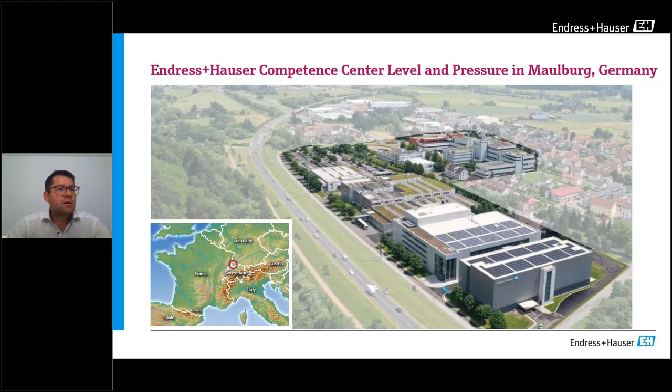And we are not producing only in Germany. We also have associated production sites all over the globe, starting from Japan, over China, India, USA, and also in Brazil. We have entities which produce devices to serve local markets. Today, we want to focus on the food and beverage industry.

For these products, simplicity and ease of use is most important. We also offer IO-Link connectivity for these transmitters, to integrate them into new digital controls. Then we have the lean segment, where we offer a modular design with various sensor technologies, different electronics and housing concepts, which enable the perfect fit in most applications in the food and beverage industry. Also for this product segment, we will offer IO-Link connectivity in a few weeks from now.

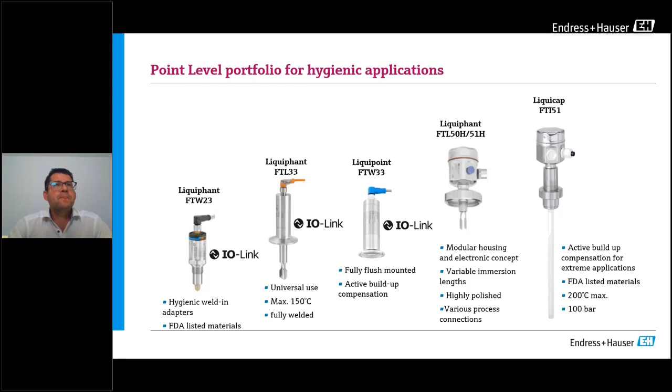But let's start with the continuous measurement. The most common technology in food and beverage for level measurement is currently the hydrostatic level measurement. By using a pressure sensor at the bottom of the tank, we can measure the weight of the hydrostatic water column and refer this to the liquid level inside the tank. This technology is very easy to understand, easy to install, and proven in use for several decades already. It's still state of the art in the food and beverage industry, and the measurement can be realized at a reasonable price.

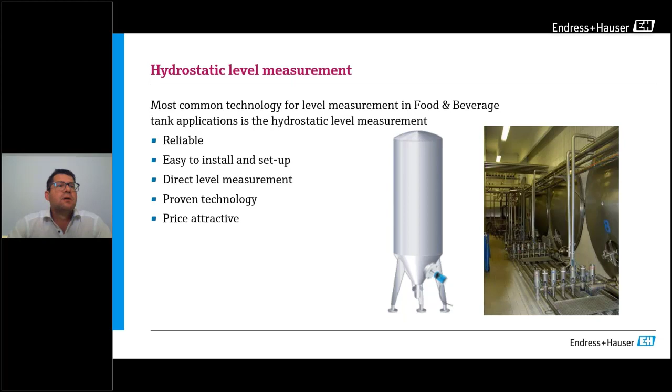But besides hydrostatic level measurement, we also offer a comprehensive portfolio of other technologies, like the capacitive technology, the guided wave radar technology, and also the free space radar. All of these technologies have their pros and cons.

Capacitance probes, for example, are often used in applications where reliable measurement in fast filling and draining applications is required, so typically narrow tanks, small tanks, filling processes. Here the Liquicap sensor has its advantages because it's a really fast measurement technology. Also, if foam is present in the application, it does not affect the measurement, so it still gives you a reliable reading of the real level in the process.

Another advantage of the Endress+Hauser solution for the capacitance probe is that it comes pre-calibrated from the factory, so you can install it and commission it without any further adjustment. So it's a real plug-and-play solution.

However, capacitance measurement cannot be used anymore if the dielectric constant of the measured media is changing. So if you have different types of media inside the process which have different dielectric constants, this has an effect on the measurement of the capacitive device, and therefore you would have to readjust the instrument, which is of course not always possible.

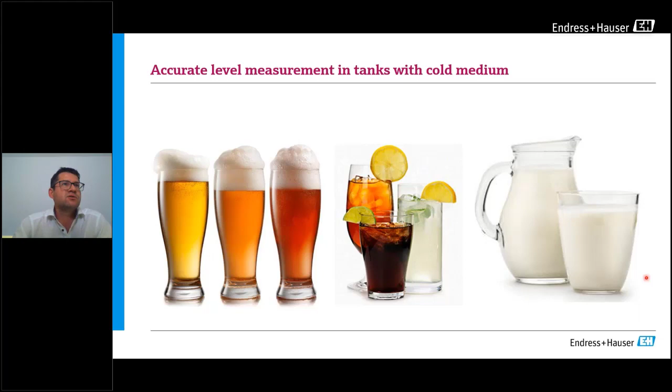This can happen if lids are not tightened properly or cable glands are loose. The so-called pumping effect is also quite a critical obstacle in the process.

This typically occurs when you have changing process temperatures, like during the processing sequence, and after that you start the cleaning cycle, and temperatures rise from close to 0 up to maybe 80 or 90 degrees. These temperature changes cause contraction and expansion of the air inside the instrument, and this pumping effect leads to the replacement of air. If the air is saturated with water or dust, it may settle inside the device.

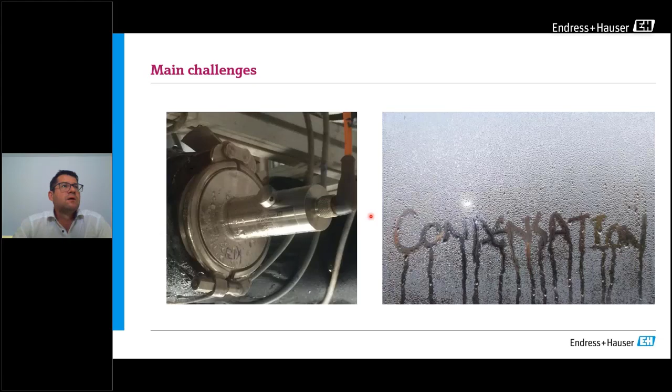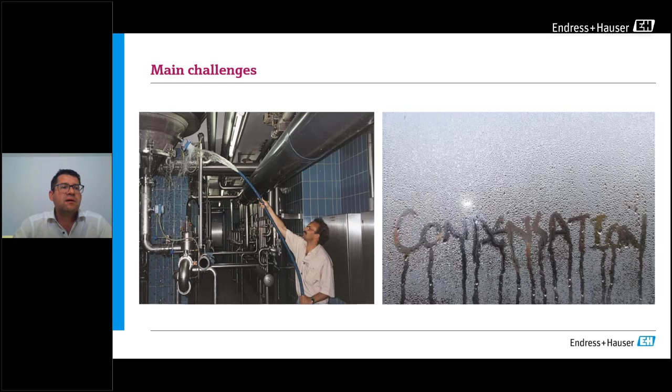You probably also know this picture. Heavy washdown also occurs in many applications, in many plants where devices are cleaned together with the whole equipment, and here too we have to make sure that everything is tight. Typically our instruments are IP68 or IP69 certified and designed.

In the industry, Gore-Tex filters are used to prevent most of the moisture and water. But as you also know from Gore-Tex clothes, it prevents water from entering through the cloth, but if you have vapour, it's still able to penetrate through Gore-Tex. So water vapour or moisture in molecular form will be able to penetrate inside. An ordinary pressure transmitter of this kind of construction will not survive very long in an application, especially a storage application for milk or beer.

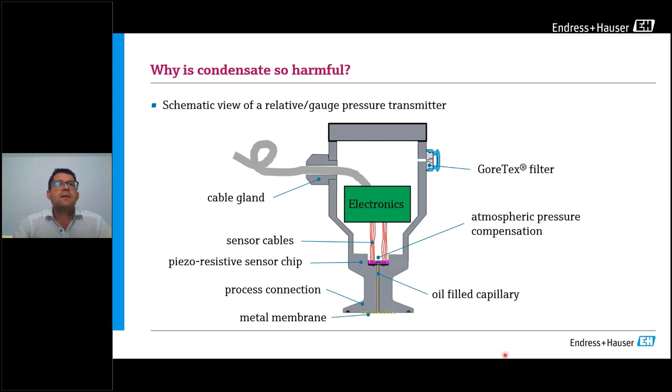Therefore, Endress+Hauser has developed two different types of technologies to prevent water from entering, especially into the sensor module. A very common and well-known technology is the so-called Contite technology with our metal membrane of the Deltapilot FMB50 and FMB70. As the name indicates, it's spelled wrongly, because when this product was designed about 30 years ago, we didn't have so many native English speakers in the company, but the name survived for 30 years. This is a technology which is really reliable, especially for hydrostatic level applications.

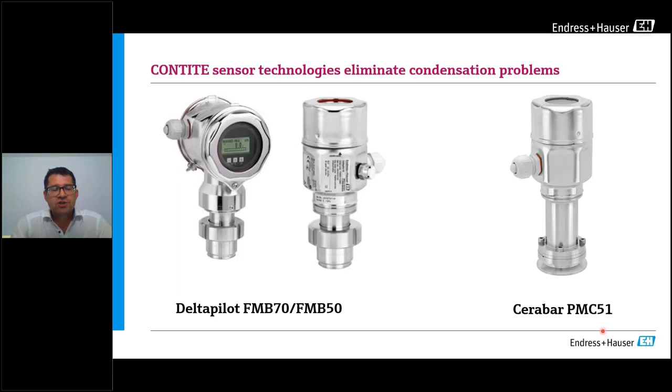Recently, meanwhile also 5 years ago, we have extended the Cerabar PMC51, the ceramic sensor module, with an additional Contite technology to make sure that the ceramic also resists in such critical applications.

What you can see here is the setup of the Contite sensor with the metal membrane. You see the metal membrane here, which is in the process, then we have the piezo-resistive sensor chip, the sensor element, and at the back side of the sensor an additional membrane, so it's a kind of two-membrane transmitter. This additional membrane is only used to prevent water from going into this little hole and flooding the sensor. On the right side you see the schematic view: the two membranes, the pressure from the process, the atmospheric pressure coming from the backside, and in between there is our pressure sensor.

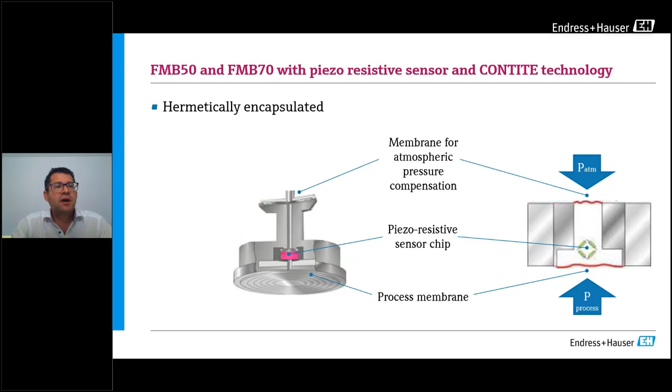Very reliable. We have a lot of devices in the market, several million installed, and there are devices coming back after 30 years of operation still in good condition. So a really reliable technology for applications when it is cold.

As I mentioned, the main benefit of the Contite technology of the Deltapilot FMB50 and 70 is its complete water resistance or condensation tightness. But we can also reduce downtime, for example during process changes, because the recovery time after temperature shocks is extremely good. We have the sensor very close to the process, and there is always a temperature sensor built onto it, which allows us to detect temperature changes from the process very rapidly so they can be immediately compensated.

That's an additional function of the Contite technology. We use a Hastelloy membrane, which has better corrosion resistance, especially against cleaning media. And also, like all our products used in hygienic applications, we have full hygienic compliance: the hygienic design criteria of 3A and EHEDG are fulfilled, and the materials used comply with FDA standards and the European Food Regulation 1935/2004.

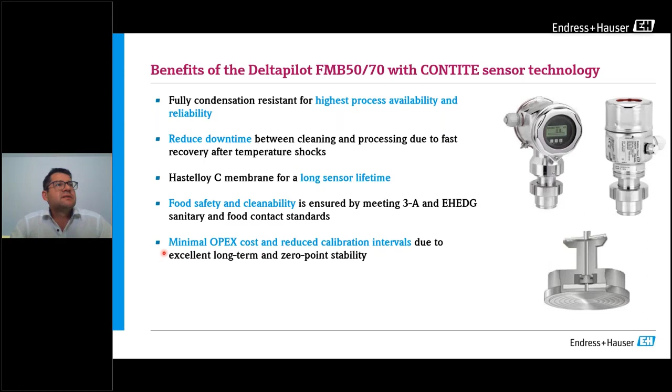The zero-point stability and the long-term stability are also very good, because we're talking about hydrostatic level measurement, which means a small change in long-term or zero-point stability will have an effect on the level reading. Especially in small tanks, this can have quite a few percentage of impact. That's why the devices are tuned especially for level applications. You can, of course, use them also in pipe pressure applications, but typically we go into hydrostatic level applications with these devices.

Accuracy, of course, especially with the premium device, we have high accuracy of the sensor, and in addition, the electronics has internal temperature compensation, which brings us a few percent of additional accuracy over the whole range.

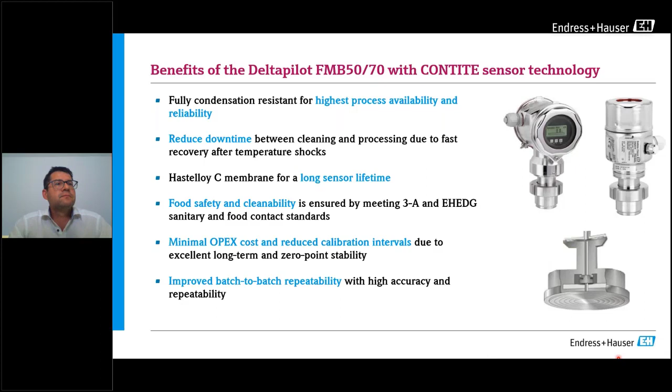The ceramic, on the other hand, uses a different technology. Here on the left side, you can see how the ceramic basic module works. We have a thin ceramic membrane and the sensor body. These two components form a capacitance. This is an oil-free sensor, so we don't use any filling oils. And you can imagine, for the atmospheric pressure compensation, if moisture were to enter into this little gap between the electrodes, it generates immediately a shortcut.

To prevent this, we have developed a very extensive installation to absorb all the moisture which might penetrate into the sensor. A so-called dehydration module is used, which has different functions, but the main function is to absorb moisture, whatever goes into the sensor.

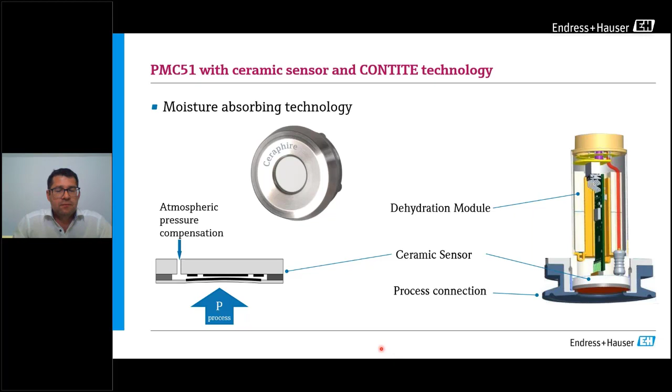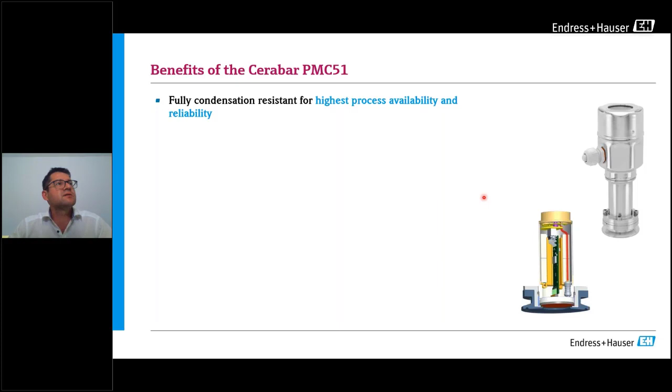And this is the PMC51. The benefits of this device are, of course, also very good corrosion resistance. We have a self-monitoring function, which is unique for the ceramic sensor. As soon as a ceramic sensor is flooded, for example from the backside with water, or is damaged mechanically, the device will immediately recognize this and send out an alarm. Ordinary pressure transmitters with metal membranes have an oil filling, and it takes some time until this oil leaks into the process—sometimes several days or even weeks until a broken sensor is identified. So the advantage of the ceramic is that it reacts immediately to any mechanical or electrical damage.

Also, a big advantage of the ceramic is full vacuum resistance, due to the fact that we don't have an oil filling, and oil typically tends to boil under certain vacuum conditions. We can go with the ceramic down to absolute vacuum, meaning 0 bar or 0 millibar absolute. And of course, ceramic is much more robust than metal membranes. So with the ceramic, we go also into applications where we have fruit pieces, for example, or frozen ice applications. All this is not a problem with the ceramic because it's very corrosion and abrasion resistant.

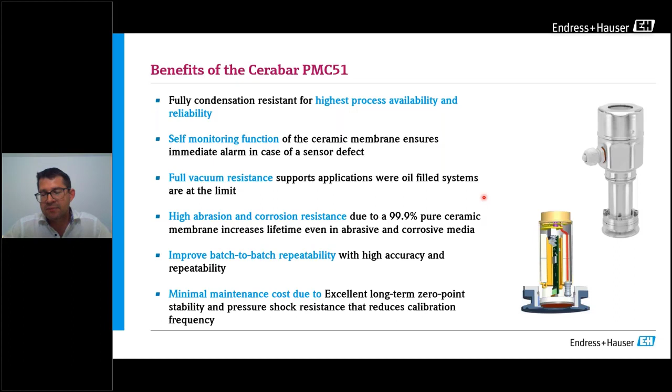Also here, high accuracy and repeatability are important—first, to come back to the production process after the cleaning cycle, but also to make sure that for hydrostatic level applications you have the needed performance. The zero-point stability and the pressure shock resistance of the ceramics is unbeaten in the industry. This technology is very reliable. Pressure shocks up to 40 times the nominal pressure range can easily be survived.

As mentioned, for these CONTITE technologies, either the ceramic or the metal membranes, you can use them mainly in applications in the milk and beer industry—fermentation or maturation tanks, soft drink applications, storage tanks where permanent low temperatures are present, but also sometimes in potable water applications, especially in areas around the equator—areas where you have typically high humidity in the air, which generates condensate quickly. So these are the applications to use a CONTITE technology.

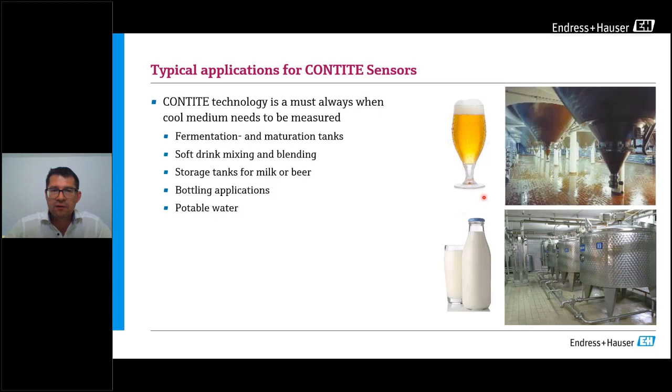Besides these already presented CONTITE sensors, we also have further types of pressure sensors in the portfolio. The classical and most economic technology is the piezo-resistive sensor, shown here on the left side. It's a relatively small sensor design with a metal diaphragm and an oil-filled capillary. Here on the schematic view, this is the membrane, here we have the oil-filled capillary, and at the back there is the piezo-resistive element. However, having the piezo-resistive element relatively close to the process means we are also restricted in the temperature range. These devices typically go up to 130 degrees; long-term, more than that would kill the electronics or the sensor module.

Then you have to go for another technology, the diaphragm seal technology. We use a similar basic sensor construction as on the left side, but with much longer capillaries, and we use a kind of adapter concept to adapt to different process connections. So this is the diaphragm seal device.

These devices are very common in the food and beverage industry. However, normally the temperatures in the process don't exceed 100 degrees because most of the media processed in food and beverage are boiling at 100 degrees, and this is typically not wanted. So the PMP51 is the first choice.

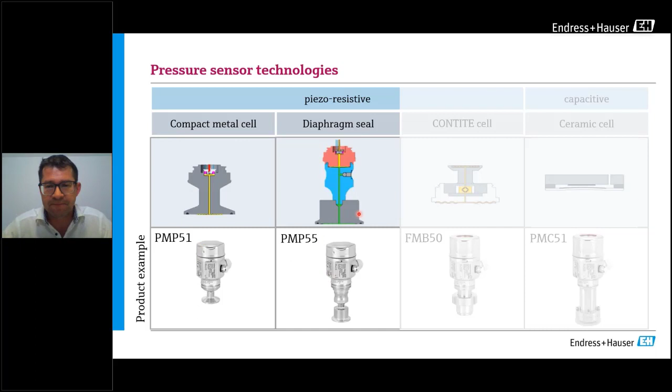Just to summarize, the four different technologies. This is the basic model, which suits most of the applications, pipe pressure applications. You can use it for steam, for water, for air, all the utility applications. We offer also threaded connections here.

So very universal device. The diaphragm seal you use when you have high temperatures, above 130 degrees - you can go up to 400 degrees centigrade by the use, for example, of capillaries. And we have an extremely high variety of process connections. Also different membrane materials like tantalum or hastelloy or monel, etc. are available.

And the two CONTITE devices, the metal device with CONTITE cell and the ceramic device with CONTITE cell, they offer, of course, especially advantages when it comes to hydrostatic level measurement. Or when you use the ceramic, you can use it also in vacuum applications, or you utilize the self-monitoring function.

Now I'm coming to the point level applications. There are various products available on the market based on different measuring principles for point level detection in food and beverage applications. Basically, three technologies have proven to be most reliable.

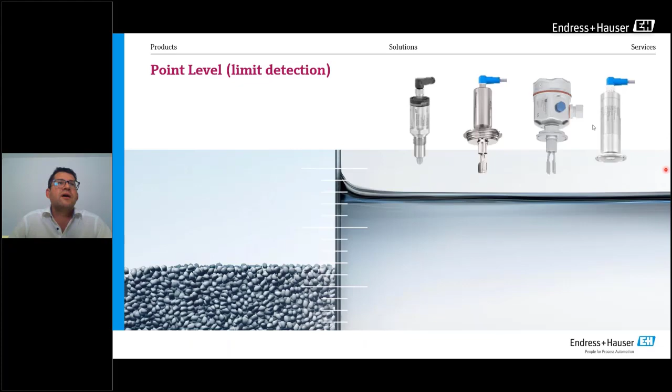So the tuning fork is an invention of Endress+Hauser. This technology was developed in the 1970s already and made its way through the decades. Today we have an installed base of more than 10 million devices out in the market in all different types of industries, not just in food and beverage, but also in chemical, oil and gas, and mining industries. This type of sensor is used to a high extent because they have proven to be really reliable and safe.

So, and why is that so? First of all, it's a plug and play device, so there's no calibration needed. You put it into whatever kind of media and it will work.

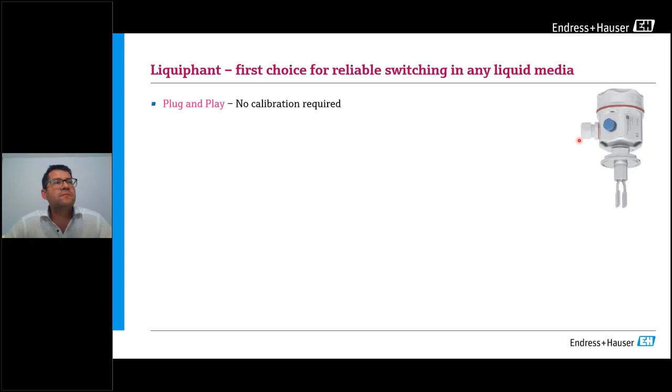Also, the mounting position is not important, so installation from the bottom is possible as well as from the side or from the top. We have an active measuring system, so it's not like a float switch, for example, which is a passive device. Here, the sensor function is permanently monitored, and by the use of our new heartbeat technology function, you are also able to monitor if the device is getting corroded.

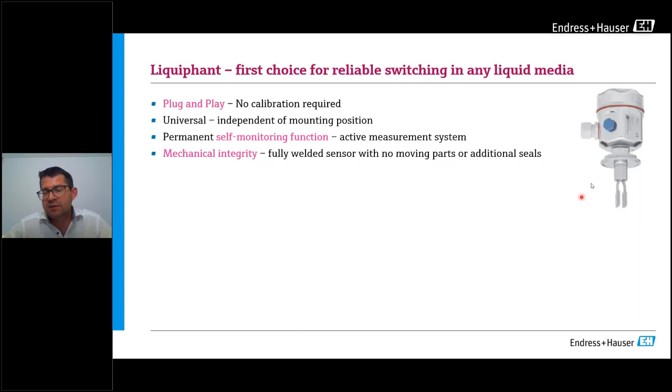Mechanical integrity is also of big importance. It's a fully welded stainless steel device, so the sensor, the process connection, and also the extension tube are completely made of one piece of metal or welded to each other. So there are no additional seals, no moving parts, and that makes it also very robust in the industry.

Also, no plastic parts which may fall into the process are used. So if you have a broken membrane or a broken sensor, for example, one of the forks is broken down, it can be easily detected in the process by the use of a metal detector.

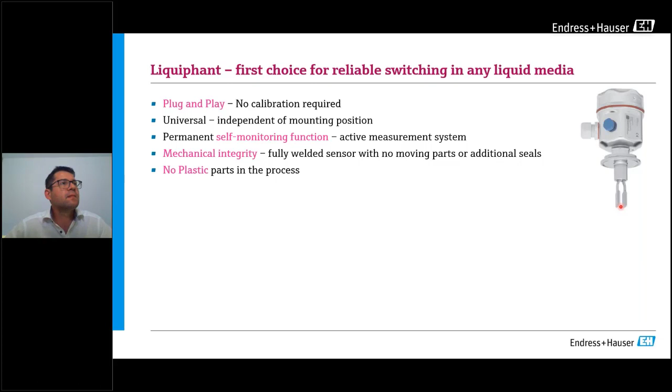But most important is that it's a completely independent system. So build-up doesn't play a big role here as long as both parts of the fork, so both tines, are free and not covered by the medium or by the build-up. It will still measure very reliably.

Also, the media properties, may it be different conductivities, oil or water-based media, or different viscosities, don't play a role. Air bubbles and foam are not measured or detected by the system, so we detect the pure liquid level. And also external vibrations don't affect the measurements, like turbulences or extreme pressure or temperatures in the process.

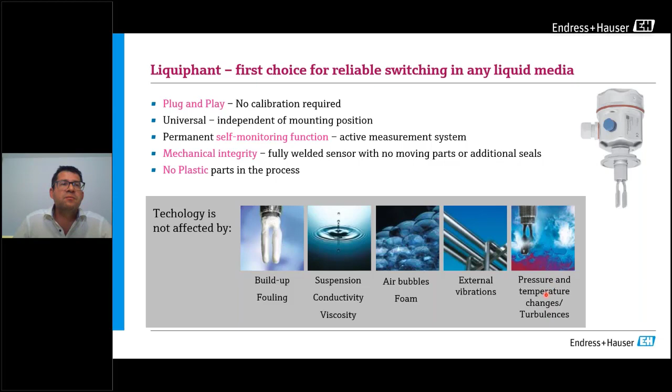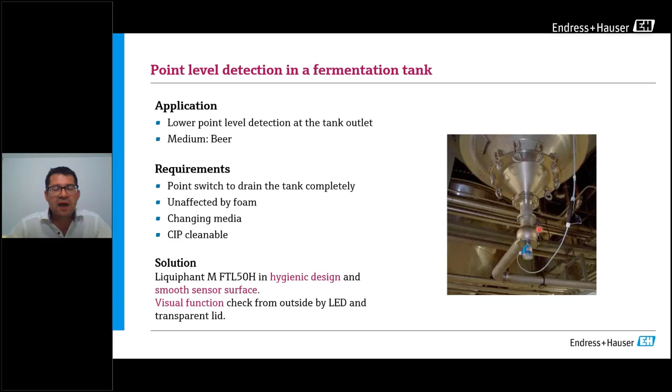Here is a typical application. We have a beer application in a storage tank. At the bottom of the tank, you see the instrument installed in a Varivent housing. The advantage of this solution is that the instrument only recognizes the liquid level, and if a bit of foam is present inside the pipe, the device would not detect the foam. So you can be certain if the device reports empty, there is no liquid phase anymore in the tank.

But there are also other technologies, like the capacitance technology. This is a very common and cost-efficient solution. The device is based on a sensor construction with a plastic cap, typically made from PEEK material. The electronics evaluate the capacitance between the sensor electrode and the grounded sensor housing. If medium is present in front of the PEEK electrode or cap, the capacitance will change, and the electronics indicate this via its switch output.

We have implemented this technology in our LiquiPoint FTW23. Like many other suppliers, we also offer a similar kind of construction. However, if medium conductivity is not stable, for example between processing and cleaning phases, this may lead to false point level indication. Also, if buildup is left on the sensor, this may affect the capacitance measurement and cause wrong indications. That's why such devices are typically used in applications with clean, water-based media like water, milk, beer, and media which don't have high viscosity.

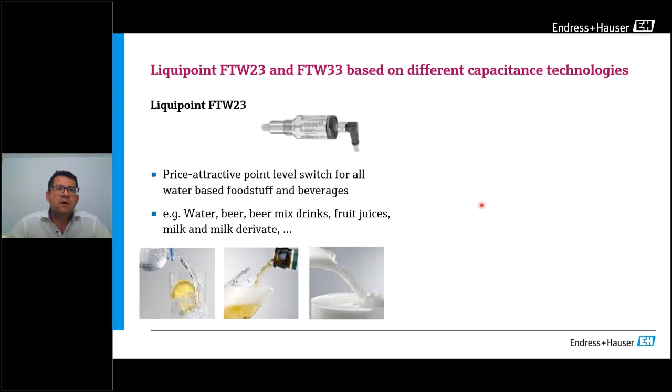With the enhancement of this capacitance technology with the LiquiPoint FTW33, we have tried to eliminate these failure causes. First, we have implemented an additional measurement electrode, so we have a multi-sensor technology here. On one side we have the capacitance measurement, but on the other hand we also use a conductivity measurement to compensate and identify the conductivity of the medium. With this additional measurement, we are able to adjust the device automatically to whatever medium is used, whether conductive or non-conductive.

We also improved the sensor design. As you can see here, it's a flush mounted design, so you don't find any PEEK cap. We have very small electrodes which are insulated against each other by the use of PEEK rings. This offers us the opportunity to use this device in applications where pigging is done, or where you have a scraper inside a tank. Also, in yogurt production it often happens that the PEEK cap is destroyed because frozen fruit pieces fall on it and the plastic is ripped off or broken, and normally it's difficult to detect this once it's in the process. So here we have a flush mounted design which is extremely robust even with such fruit pieces in the process.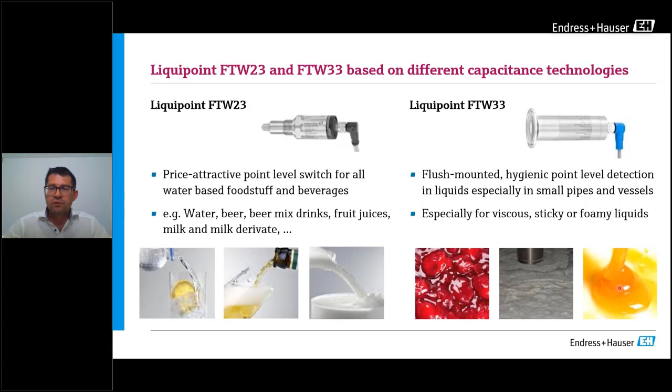Just to summarize, the FTW33 offers full flush mounted installation, so pipes remain pigable. You can use it for water and oil-based media. No adjustment is needed because the device adjusts itself via the separate electrode. Here you can see how the sensor looks when installed flush mounted in a welded adapter that you can also get from us.

Also, if there is buildup on the sensor, it switches very reliably due to the active buildup compensation. Needless to say, we have a lot of different process connections for all kinds of applications, and here the IP69 rating for cleanability with a high pressure cleaner is given. All our devices for the food and beverage industry for hygienic applications can be cleaned and sterilized in place, so they survive for a short term the sterilization temperature of 130 up to 150 degrees.

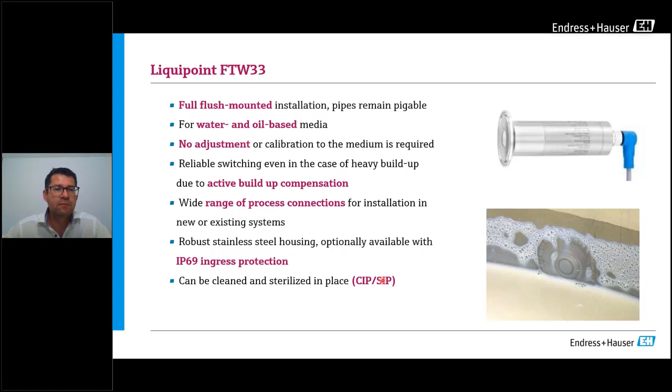Here is a picture of the FTW33 with buildup on it. If you dip it into the jam, like on the left side here, and remove it again, the device will switch back to the empty state because this residue left on the sensor is not considered as level. Same also here with mayonnaise.

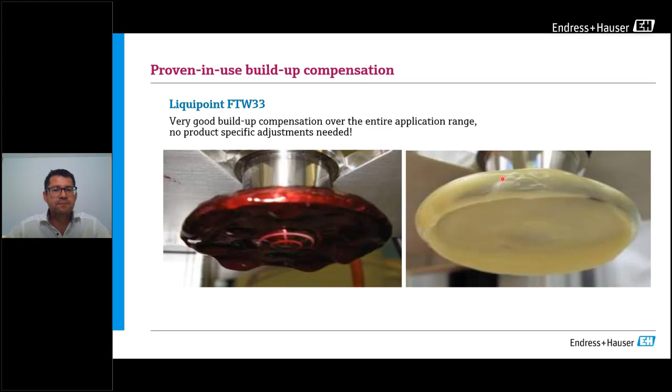So the segmentation for the food and beverage industry for the most common sensor technologies: pure capacitance devices should be used mainly in applications with conductive, water-based media. The Liquiphant, the FTL33 for example, but there are also other devices with the same sensor technology you can use for most pumpable media. Only if the medium becomes really sticky and viscous should you use the FTW33 for these special applications. So from my perspective, for basic applications use this one, it's of course the most price attractive solution. If you're facing a challenge of buildup or high viscosity, you can use the other two solutions.

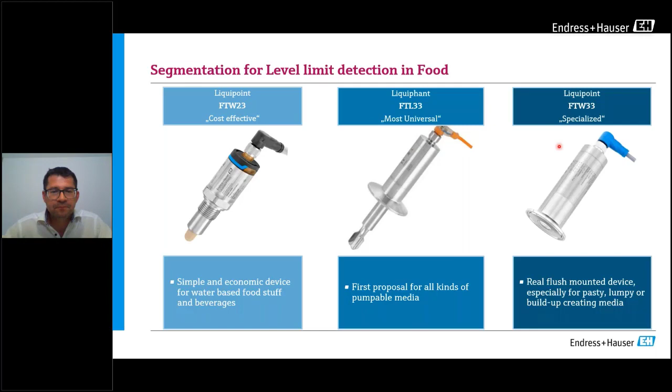This works in all media from water-based to sticky and viscous media, and also media like sunflower oil, which are completely non-conductive. So the device works perfect. Honey, peanut butter, ketchup, mustard, everything is possible. The vibration fork technology works also very well in different types of conductive and non-conductive media.

However, if the media becomes too sticky, the viscosity is too high, you should go for another technology. And as mentioned, the FTW23, the device with the PEEK cap, should be used only in applications where you have clean water-based process medium.

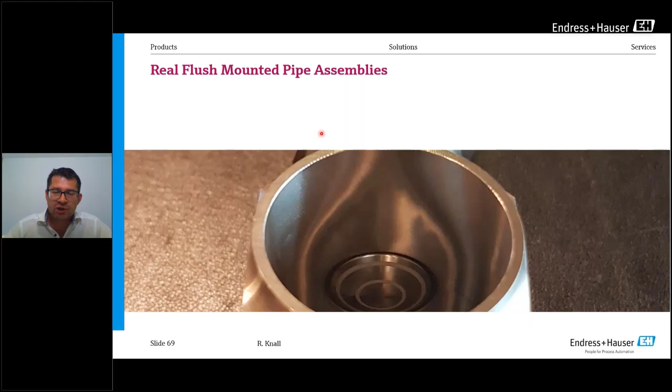So that's possible without changing the process connection or the welding adapter. We also have a new assembly that we offer especially for narrow pipes. It's a solution that you can use for applications in 1 inch up to 2 inch pipes. It offers a completely flush mounted installation of our sensors, without any air pockets or recesses where probably bacteria can nest.

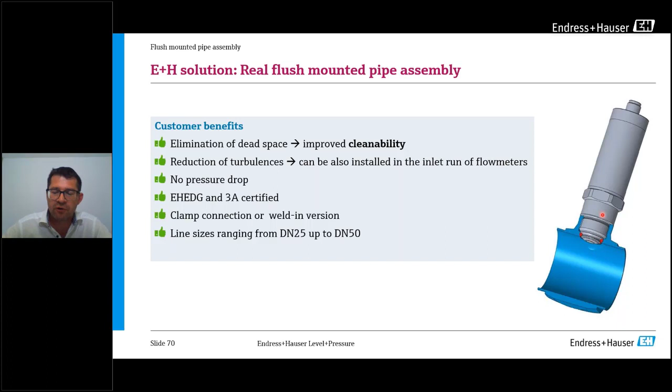So all E+H devices which have an M24 × 1.5 process connection fit into these assemblies.

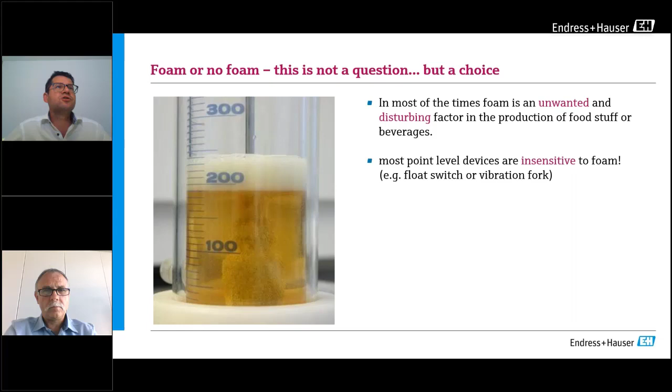And like what you mentioned, Matthias, the second foam technology to measure or detect foam is with our radar devices. With heartbeat technology, we offer the possibility to monitor foam formation. It depends a little on the type of foam, the density of the foam, and also the conductivity of the foam, but it's possible to monitor, besides the level measurement itself, also foam. It needs a little setup, but since we have Bluetooth connectivity with the radar devices, it's relatively easy to set up the device for different use cases.

Perfect, thank you. Then there's another question. What pressure sensor would you recommend for a vacuum application, for example in a juice deaeration system?

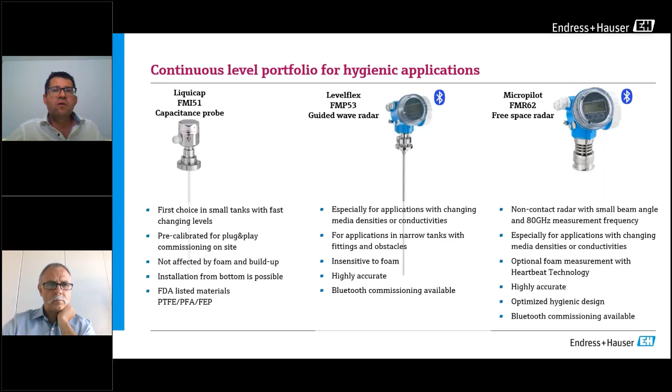So, vacuum. Here the choice is relatively easy because, as I mentioned, when we look at the application range of our pressure transmitters -- here we go -- all three devices on the left side use metal membranes with oil-filled systems. Some have just a few drops of oil inside, like this one on the left or the one on the right. This one has a bit more oil inside, and oil always has the disadvantage that it expands or contracts when temperature or pressure changes.

Especially when you have vacuum, the oil inside these three devices will start to evaporate, depending on the application, the temperature, and the vacuum itself. But a safe choice is always the ceramic technology, because here you can apply full vacuum and the device works completely without any problems.

Okay, and then we have one application in a chocolate factory. So you had one slide with recommendations on an application chart, which instrument to use when. And the question is, it's a little bit tricky -- usually the chocolate should be liquid. So what is the application fit chart for our instrument? Is it then a liquid? Because sometimes it gets solid as well. So what do you take care of in chocolate production when it comes to level and pressure?

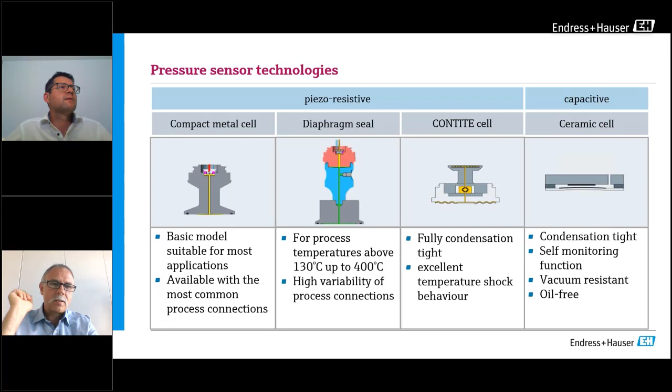Now you're talking about point level? I talk about, in this case, not really a specific instrument. I think you showed one slide where you clustered the instruments in different application fits. You mean this one? Yeah, this one.

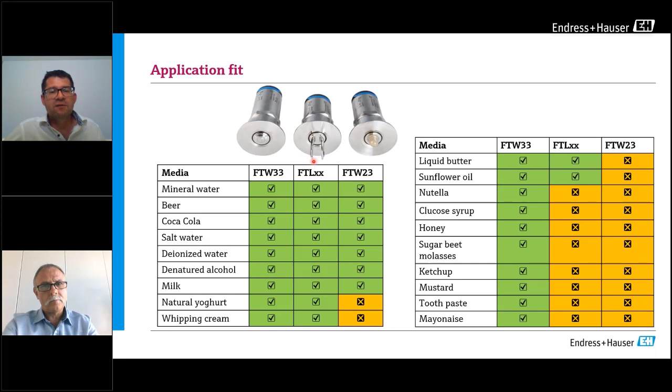Yeah, so of course viscosity is always an issue. If you have chocolate which starts to crystallize and becomes brittle or solid when the temperature is going down, then you may have an issue in your process anyway, because you need to clean it either mechanically or with a high pressure cleaner. I would say we don't recommend using this one in such applications due to the stickiness of the material. I would also not go for the Liquiphant, because if you have a solid block of chocolate forming on top of or on the sensor itself, it will definitely affect the measurement. It will recognize this chocolate.

The best solution would be the FTW33, because even if there is chocolate available and in a solid state, you need to clean it mechanically. You will not damage the sensor if you use a brush or a scrubber to clean off the chocolate from the process. And if it's heated up again and starts to liquidize again, it's also easy for the device to continue operation. Yeah, I think that might be the best solution.

You will have, if you follow the presentations on Thursday when we talk about flow instruments, the same situation. It depends always. It's always good to have an instrument which can work with both situations. And if the chocolate gets hard, the important thing is that the instrument is not breaking down and getting damaged, and that when it starts to melt again, if the temperature rises, the instrument starts working again. That's the important thing.

And then we have maybe as a last question, it goes more to the connectivity. Will the IO-Link instrumentation give as well a 4 to 20 milliamp output signal? Yes, for all of our IO-Link electronics, we offer also a 4 to 20 milliamp output signal, at least for the devices which are used for continuous measurement.

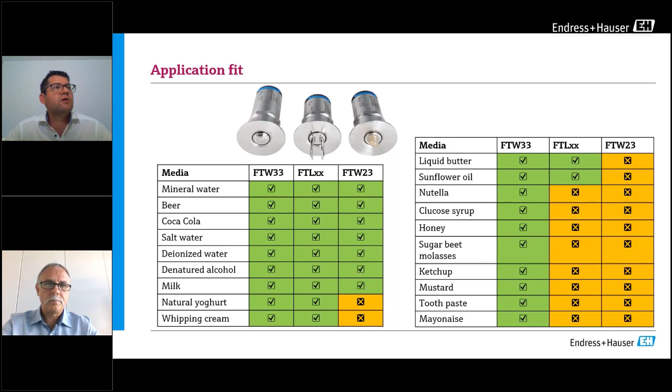For the switches, we don't have a 4 to 20 milliamp output because we don't have a continuous signal to transfer. But for the pressure transmitters, for example, I just want to highlight again the upcoming IO-Link electronics for our high runner, the 50 series. Here we will also have an additional 4 to 20 milliamp output. It's a 3-wire output, so this means you need to connect 3 wires to get the device up and running.

If you use that one with IO-Link - if you use the device without IO-Link, you can connect it with 2-wire cables. If IO-Link is needed, then you need to go with a 3-wire installation. But it's just a different wiring, the rest remains the same.

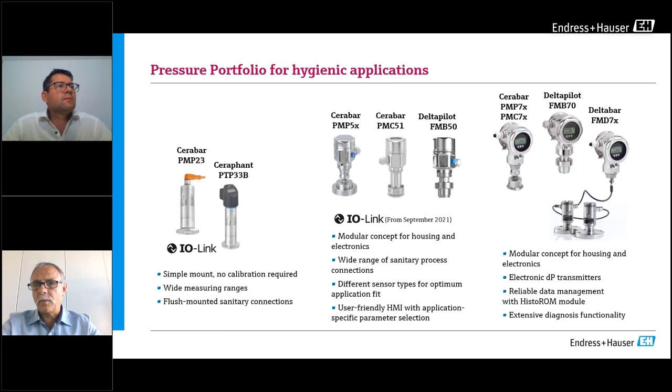I hope we could give you a little bit of an idea about the new innovations, about the new instrumentation. The main thing we like to give you is the idea that we have the instruments for all your applications, and we have for each and every application exactly the right instrument. So it doesn't matter if this is a hygienic application, an easy low-end application, or really a high accurate application you need, because it's something quality relevant for your process.